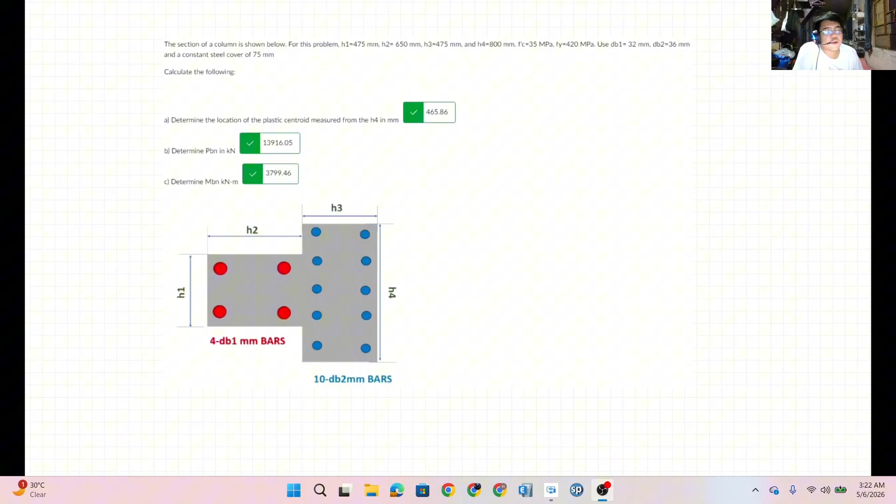Mag-solve tayo ng mga problems ulit about sa diniscuss natin last time, yung columns with eccentricity. For this problem, T-column naman yung isosolve natin. Tignan natin kung paano mo solve to. Again, this problem is from my prof, exercise niya sa akin. So shoutout sa prof ko dyan, sir. Okay, try natin mag-solve ng T-column, tas tignan natin kung anong pinagkaiba yan sa square or sa rectangle.

Sabi dito, the section of a column is shown below. For this problem, we will use H1 is equal to 475 mm. Lagay muna natin yung mga dimensions. This one is 475 millimeters. Tapos yung H2 natin is 650 mm. Kapalan nga natin yung dimension, so this one is 475 mm. Then our H3 is 475. And lastly, our H4 is 800 mm.

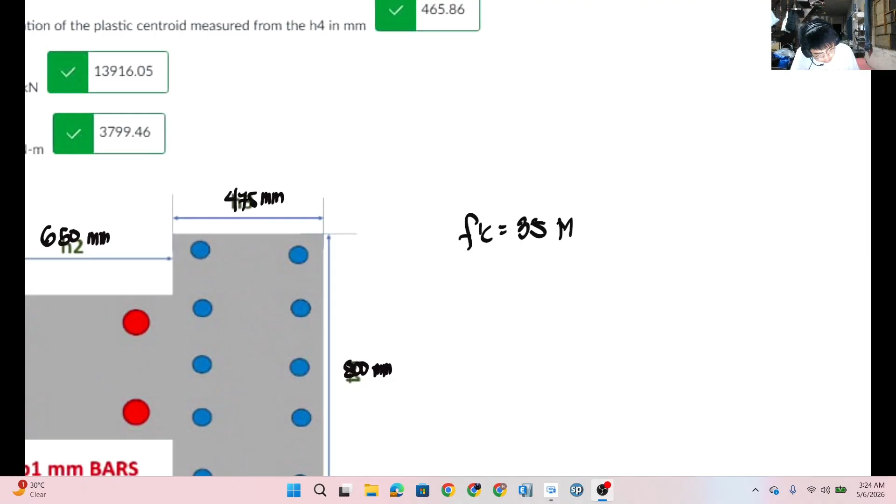Then we are given material properties: F prime C natin is 35 MPa. And our Fy is 420 megapascals. Use dB1 or the diameter of bars na pula, 32 mm. Tapos sa dB2 naman, 36 mm. And the constant steel cover is 75 mm, meaning lahat ng bakal natin is 75 mm yung distance nila or yung distance ng centroid nila from the face ng column. So lahat ng sides na yan, 75 mm yung pagitan from the face of the column.

By the way, may mga tamang sagot tayo, no? Tumama si classmate dito, so may reference tayo. Papakita lang natin kung paano nakuha. Determine the location of the plastic centroid measured from H4. So saan ba H4, guys? Ito yung H4. Okay, this is your H4. So unahin muna natin yung plastic centroid.

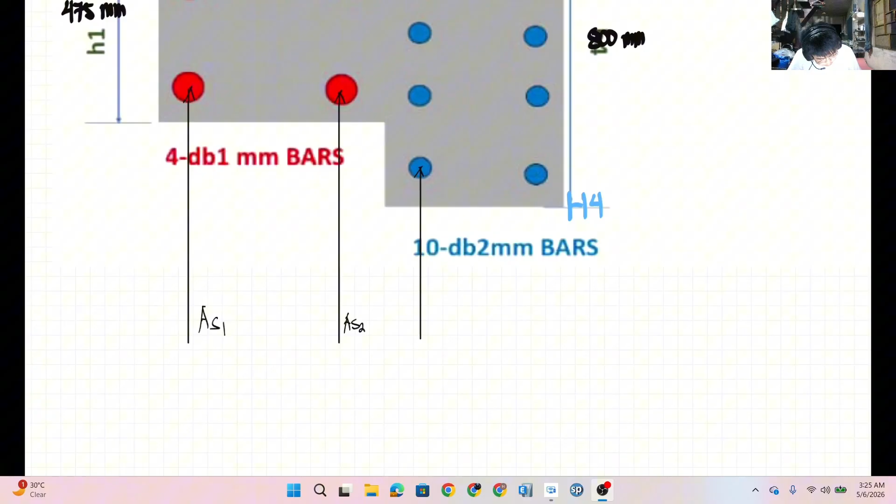Wala namang pinagkaiba yung approach pagdating sa plastic centroid. Kailangan lang natin ulit na magsukat-sukat. Pangalanan muna natin yung ating mga bars. Let us say this is AS1, this is AS2, the third steel is AS3, and the last is AS4. Paano naman yung CC natin or the concrete? Irregular na siya, hindi na nag-aak sa gitna. So pwede natin gawin ay hatiin natin yung concrete section natin o yung section natin mismo para magkakaroon tayo ng dalawang concrete section.

Dalawa na magiging natin gross area. Paano yan, classmate? Pakita natin kung paano. Sabihin natin na dito, nahatiin natin, so therefore magkakaroon tayo ng dalawang concrete. Let us say na ito yung CC1 natin, tapos ito yung CC2. Sa gitna pa rin nag-aak yung ating CC o ang compression concrete. Bakit natin hinati? Kasi mahirap hanapin yung centroid niyan kung T-section. Pwede naman, wala namang problema doon, pero ako, for simplicity at para mas madali yung approach, hatiin na lang natin sa dalawa. Dalawang rectangle, tapos yung kanya-kanyang compression concrete nun, mag-a-act sa centroid nila.

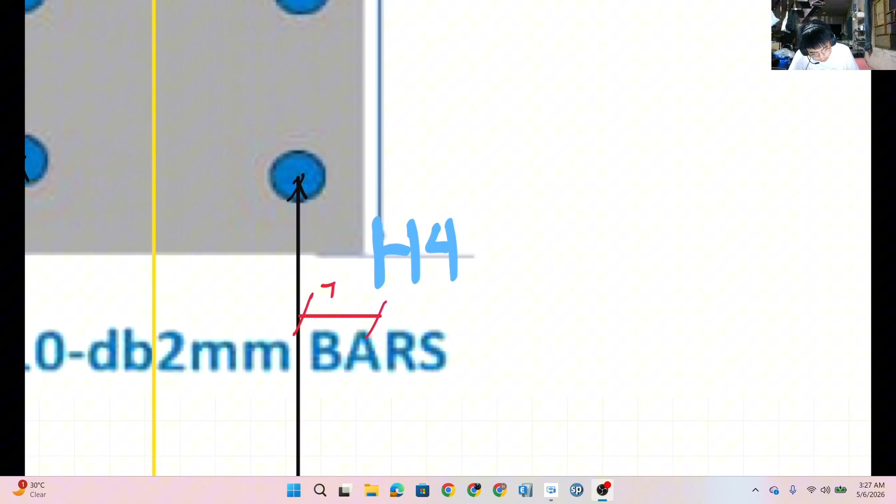So ayan, H4, yung reference natin. So we have to measure distances from the H4. Sabihin natin ito, di ba given tayo ng steel cover na 75 mm, and the distance ng centroid niyan from the face of the column is 75 mm. Tapos ito, yung AS3 natin is 475 minus 70. Bakit? Kasi ang distance nito is 70 mm, no, lahat 75 pala. Kasi lahat ng ating bars is 75 mm yung steel cover nila from the face of the column. Gamitin natin yung concept na yon. So ayan, 75, so magiging 475 minus 75, that is 400. Kita naman, guys? Sige pakita natin, ayan, this is 400.

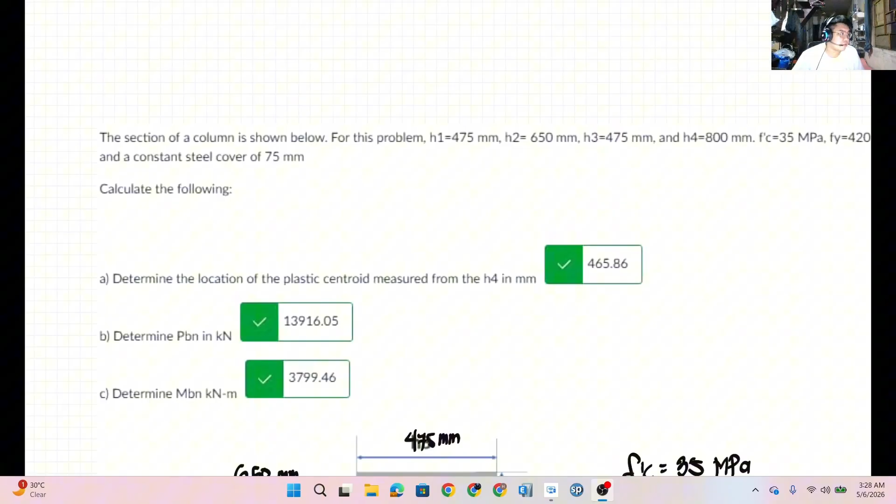Tapos yung ating AS2, and distance niyan from H4 is 475 plus 75. Bakit tayo nag-plus ng 75? Kasi di ba yung steel cover natin is 75, from the face of the column yun. At kung 75 yan, di 75 din to. Eh sabi nga kasi constant yung steel cover natin, so kahit anong direction yan, basta humaharap siya sa face ng column, 75 yon. So ayan, 475 plus 75, gawin na natin yung calculate natin. Lumabas sa ating computation ay 550, ang distance ng ating AS2 from the H4 o yung rightmost na face. So yung AS1 natin, lastly, since yung steel cover nga natin is constant, 75 to.

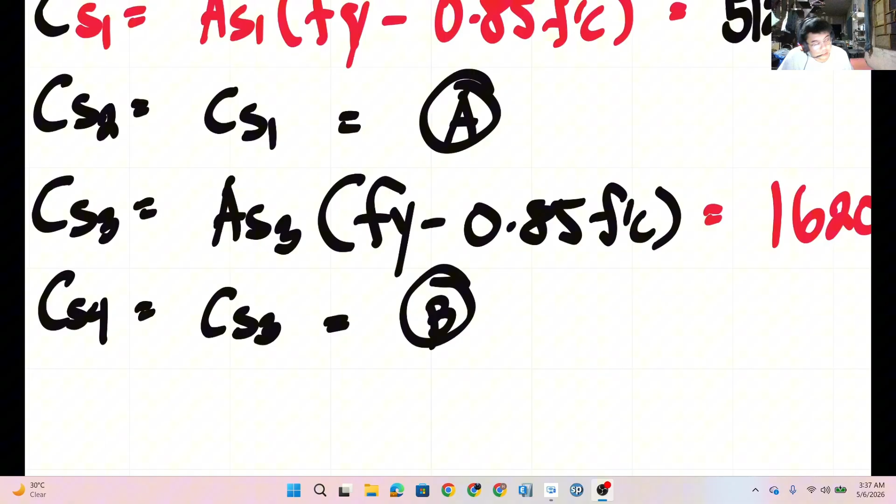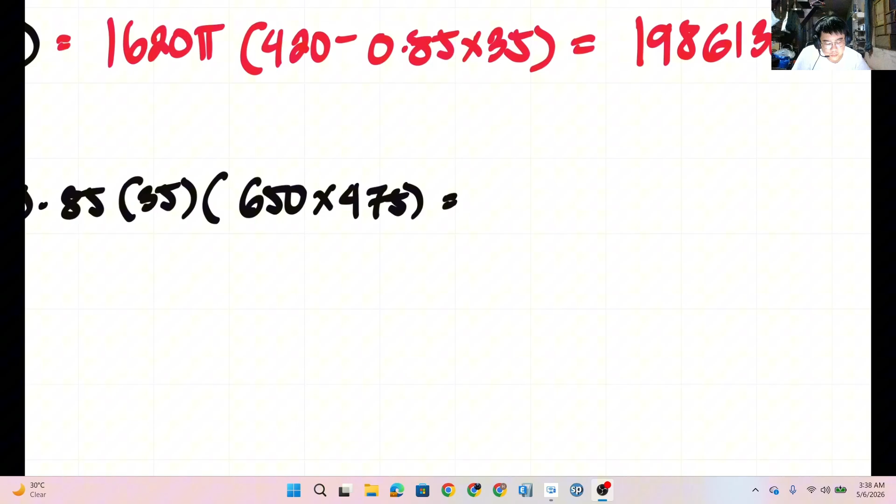We know the formula for CC is 0.85 F prime C AG. We have two gross areas because we cut the T column, so let's call this AG1. Let's substitute the values: 0.85 times our F prime C which is 35, then our AG1 is going to be 650 times 475, which is the gross area. So the value is going to be 0.85 times 35 times 650 times 475.

That's going to be 9,185,312.5 Newton. Let us store this value in letter C for our CC1. For CC2,

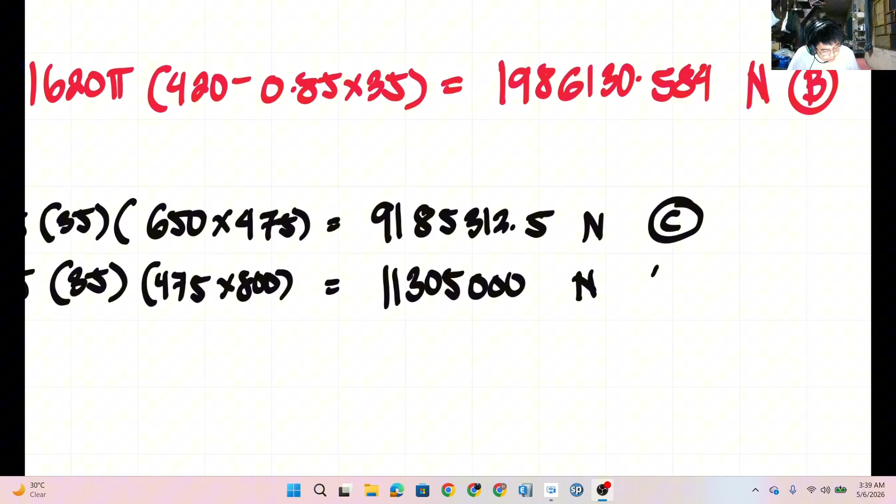0.85 F prime C again, but with AG2. Let's set up 0.85 times 35, and for AG2, area again, and that is a rectangle so length times width: 475 times 800. So the value is going to be 0.85 times 35 times 475 times 800. So the value we got is 11,305,000 Newton. Let us store this value in letter D.

So, our forces are now complete. Next step, step 2, let us solve for the resultant. Again, the resultant is simply the summation of forces, so let's sum up all the values we got. There are 6 of them, so let's just add them all.

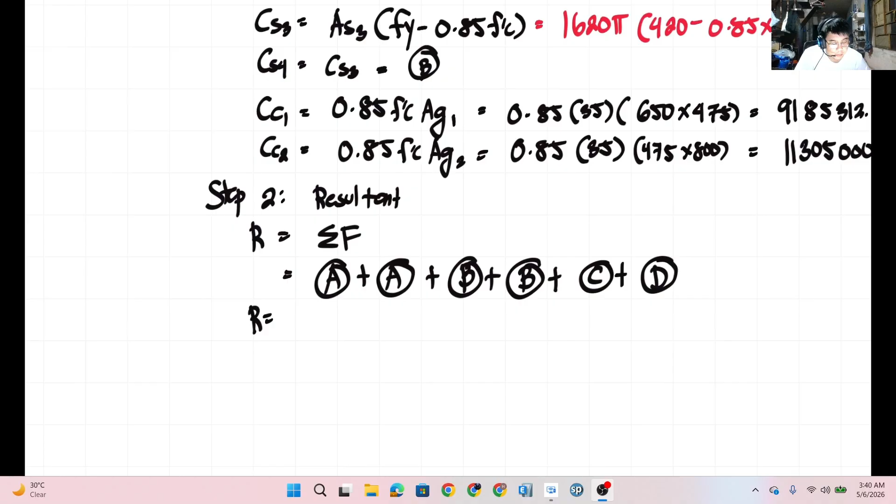That is going to be CS1 stored in letter A, plus CS2 also stored in letter A, plus CS3 stored in letter B, plus CS4 stored in letter B, plus CC1 stored in letter C, and lastly CC2 stored in letter D. And the resultant of our forces is going to be letter A plus letter A plus letter B plus letter B plus letter C plus letter D.

So the resultant we got is 25,718,004.36 Newtons. Let us store this value in letter E.

So for the last step, step 3, this is just Varignon's theorem. So, x bar PC or the plastic centroid is equal to the summation of forces times their distances from the left face, or rather the right face of the column. So there we go, we also have the distances now, so we can get x bar PC, the plastic centroid. Our resultant is stored in letter E, then x bar PC as our unknown is equal to... let's get CS1 first.

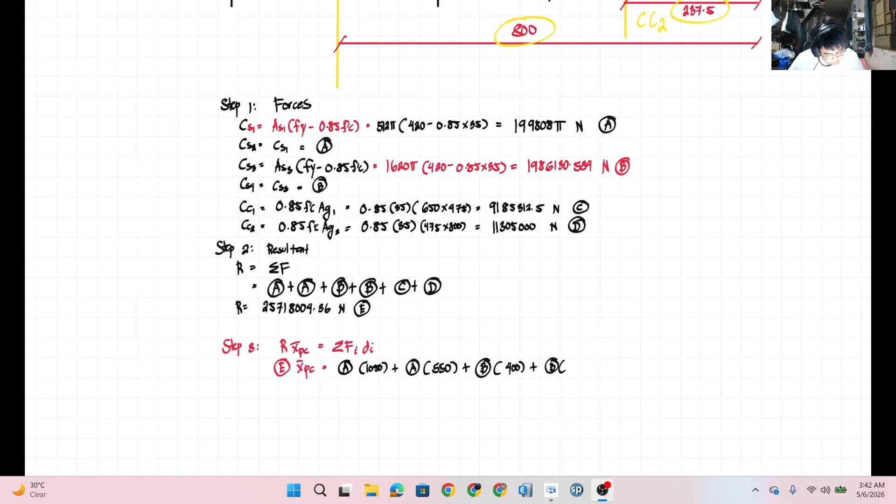So 550 plus our CS3, which has a distance of 400 from the right face, which is our reference. Plus CS4, also stored in letter B, same since they're the same, so it has a distance of 75 from the right face. So 75. Plus our CC1, stored in letter C, which has a distance of 800 mm from the right face. So let's just place it. Plus letter D, which is our CC2, with a distance of 237.5.

Now we can solve for the plastic centroid. This is a shift-solve problem, though you could also just divide everything by letter E. I'll just do a shift-solve. So letter E times x equals letter A times 1050 plus letter A times 550 plus letter B times 400 plus letter B times 75 plus letter C times 800 plus letter D times 237.5.

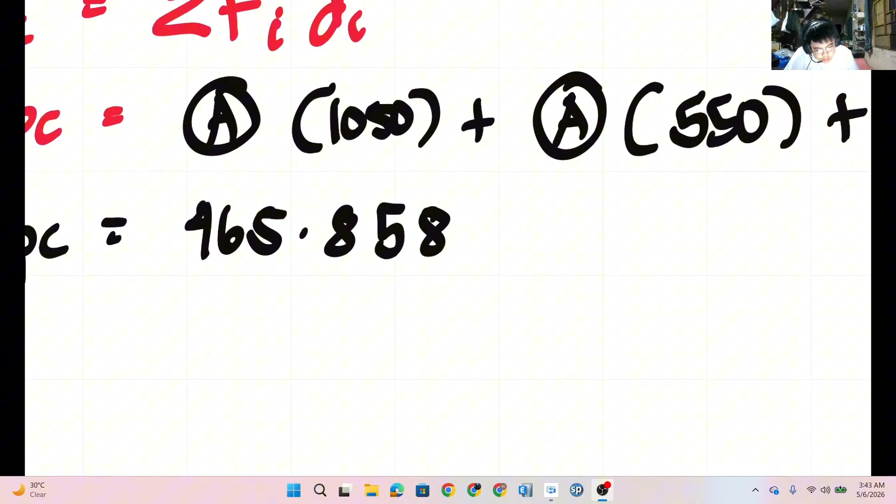So upon shift-solving, the value we got is 465.86 — two decimal places, okay. Let's complete it, we might need it later: 2335. Rounding that off to the nearest two decimal places, that is going to be 465.86 mm. Let's box that.

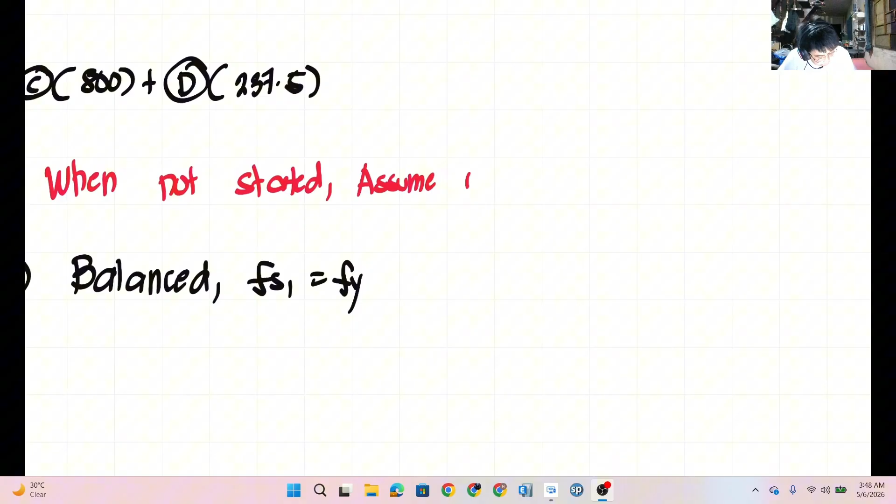When not stated, assume positive bending about the y-axis. So when the direction of bending isn't stated in the problem, we will consider positive bending about the y-axis.

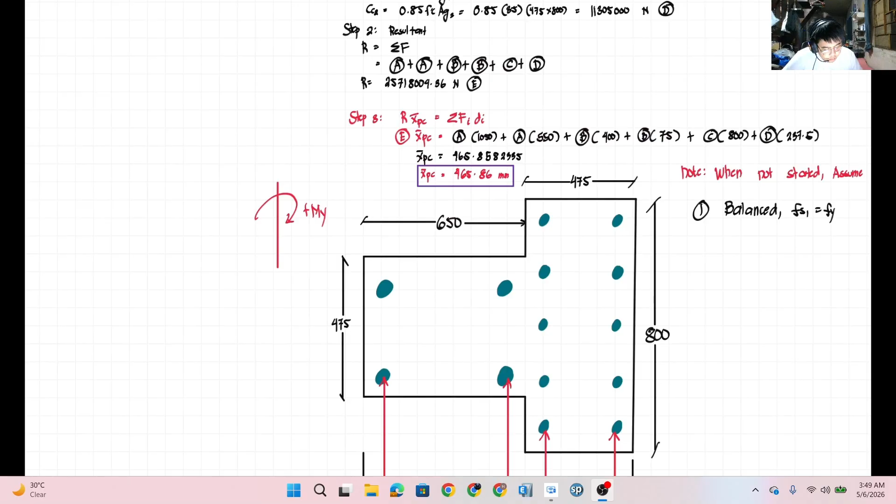In this case, it's positive bending moment about y. Therefore, the rightmost face is what experiences compression, and that would be our ECCF. Don't get confused by this, we already explained this concept in the last video.

Again, when it's positive bending moment, our ECCF is going to be the rightmost. So classmates, what about when it's negative bending moment?

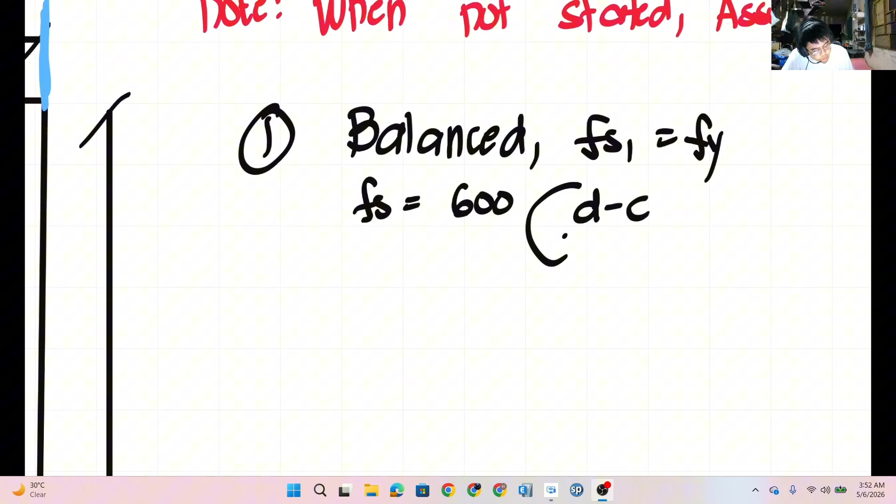So we can now equate this. Our FS1, or AS1, the extreme tension bars, farthest from the ECCF, is at yielding condition. So we'll use the formula Fs equals 600 times D minus C over C, and since this is Fs1, we use D1.

Let's substitute now. Our Fy is 420, let's use that. So it's equal to 600 times D minus C over C. Again, this is balance condition, so C balance.

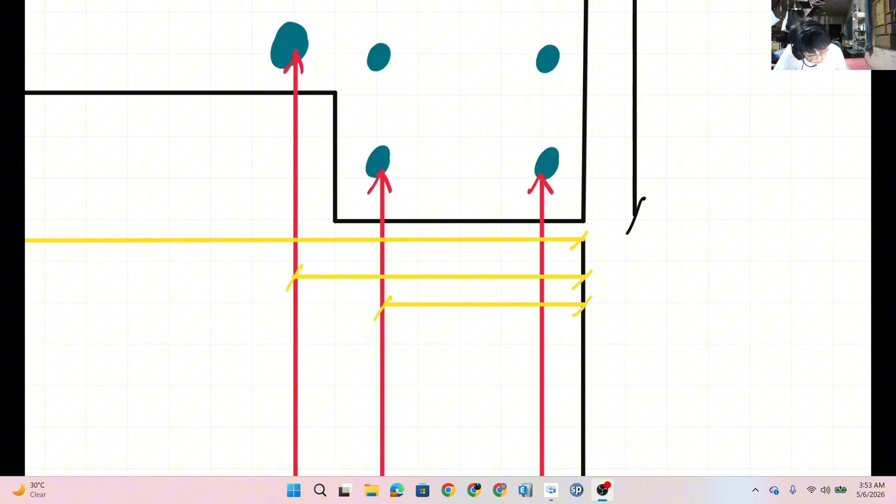So our D1 is going to be 1050 - that's in millimeters, don't get confused. Our D2 is going to be 550. Our D3 is located 400 mm from the ECCF. And D4 lastly is 75.

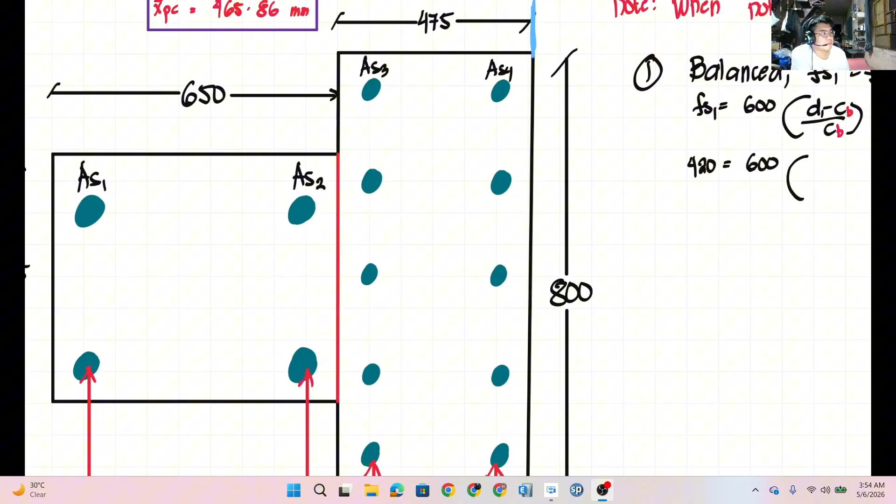Our D1 is 1050, so let's use that: 1050 minus C balance, over C balance. Now let's solve for the value of our C balance.

420 is equal to 600, 1050 minus alpha x over alpha x, which is our C balance. So, ano ang ating value dito ay

Di ba meron tayong relationship between A and C? A is equal to beta 1 C. And let us solve for the beta 1 muna. Since ang f prime c natin is 35, that is greater than 28, so lalagyan natin ng formula.

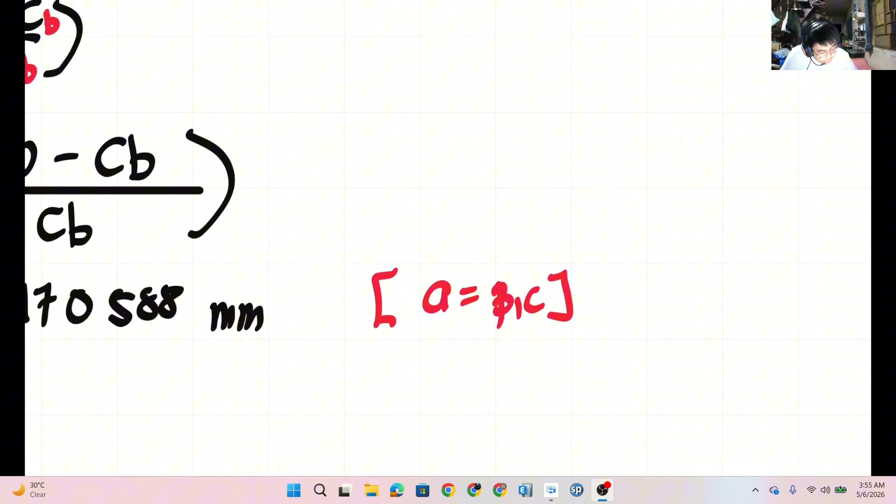Kung naalala pa yung formula, that is 0.85 minus 0.05 over 7, tapos F prime C minus 28. Dapat alam natin yung by heart. Palitan natin to ng 35, so makukuha natin yung value ng beta 1 natin. Store muna natin to, baka magkalimutan, store natin to sa letter A.

Ang nakuha natin value ng beta 1 ay 0.85 minus 0.05 over 7 times 35 minus 28. Ang nakuha natin ay 0.80.

So, we can now solve for the value of A. Ang A balance natin pala is 0.8 ng C balance, which is nakastore sa letter A. So A balance natin ay may value na 0.8 times alpha A, that is going to be 494.1176471 mm. Sorry guys, kilonewton mm. And let us store that value sa letter B.

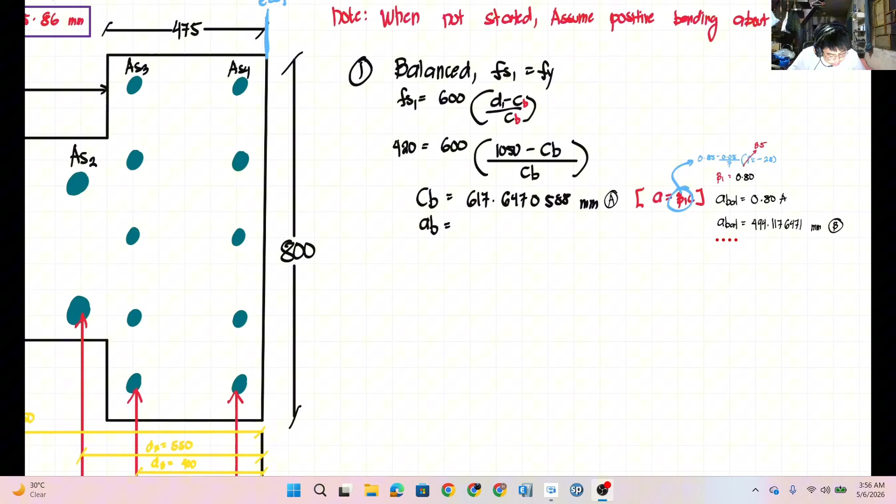Lipat na lang din natin to. So pwede na nating i-plot actually yung C balance sa A balance natin para makagawa tayo ng strain diagram. Alam natin na yung C balance natin located 617 millimeters from the ECCF.

Mag-approximate lang tayo kung saan yan guys. Since ito, 550 to, yung dito natin, lalagpas siya. Let us say na located yan around here. Ibahin natin yung kulay. Ayan, this is our C balance.

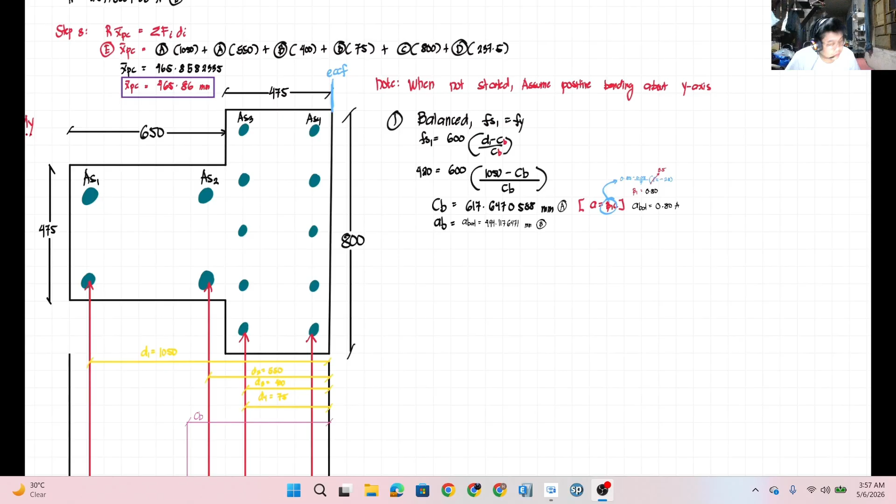Yung A balance natin is located 494 mm approximately. Saan yan? Since ito, 475, lalagpas siya ng rectangle na section na to. Ito, so somewhere here siya. Pero i-plot natin. Pero hindi siya lalagpas ng D2.

Mag-approximate lang tayo ng distance. Siguro somewhere siya here. Ibahin natin yung kulay para mas malinaw. Red na lang, ay wag red, siguro black na lang.

This is going to be the value of your AB. Plot lang natin dyan sa baba, at gawa tayo dito ng line siguro dito. Masyado makapal, nipisan lang natin. Ano ibig sabihin yan guys, by concept alam natin, na-explain natin to nung isang araw.

Yung C value natin indicates if steel bars is in compression. Alam natin yon. Yung C value natin, kapag yung mga steel bars mo nasa loob ng C value, ibig sabihin in compression siya. Otherwise, kapag nasa labas na siya ng C value, in tension na siya. So how about yung A?

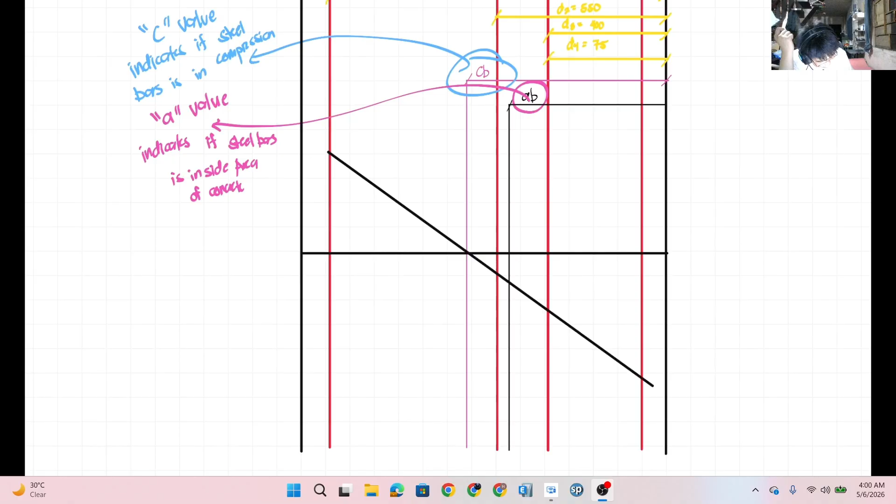Mag-plot lang tayo dito ng line para makagawa tayo ng strain diagram. Paano ba yung strain diagram na yan? Ibahin nga natin yung kulay para maganda, sabihin natin green. Alam natin yung AS1 natin, these bars,

is equal to Fy kasi in-equate natin yan, di ba? At balance condition, yung Fs1 natin is equal to Fy. Tapos ito naman yung ating Fs2, tapos ito yung ating Fs3, tapos ito yung Fs4.

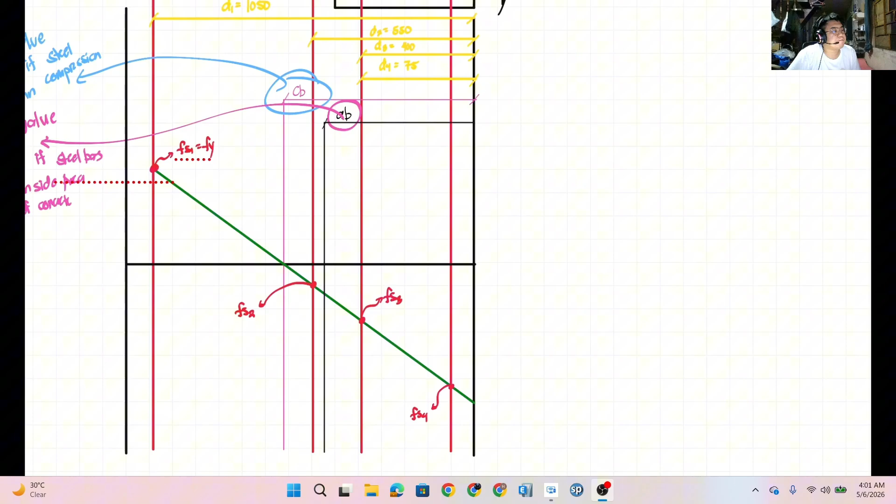Pero hindi natin kailangan mag-assume guys, kasi naka-balance condition naman tayo. Meron tayong value ng C, ayan makukuha natin yung mga actual steel stress nila. Tignan na lang natin, palitan na lang natin mamaya yan kung mag-yield ba o hindi. Pero hindi natin kailangan mag-assume kapag balance condition. Nag-assume lang tayo kapag may given tayo na eccentricity. In this problem naman, pinapasolve lang yung value at balance condition.

Step 2 tayo. Yung step 2 natin are the stresses.

Okay, so we know our Fs1, guys. We don't need to solve for Fs1 anymore because we equated that to Fy. At balance condition, we equated that to Fy. So the value is 420. So, Fs2.

And if you noticed, our Fs2 is inside the C value or the compression balance. So that means it is in compression. So the formula we'll use there is 600 CB minus D2 over CB. Okay, let's solve it.

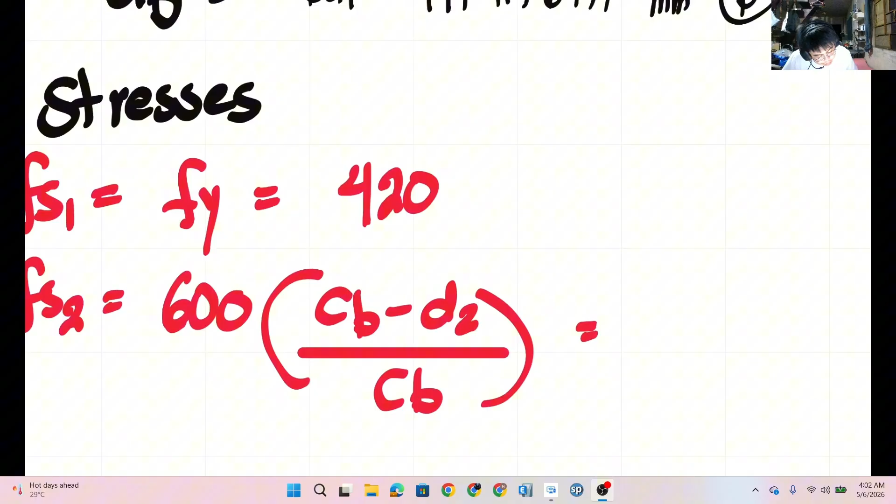By the way, the value of our CB is stored in letter A. And our D2 here is 550. Okay, so we can now solve for the value. 600 alpha A, alpha A minus 550 over alpha A. Okay, so the value we got here is 65.7142857.

And this is less than Fy, therefore it's non-yielding, non-yielding condition. So let us store this value in letter C. Okay, our Fs3. And again, it's inside the compression zone.

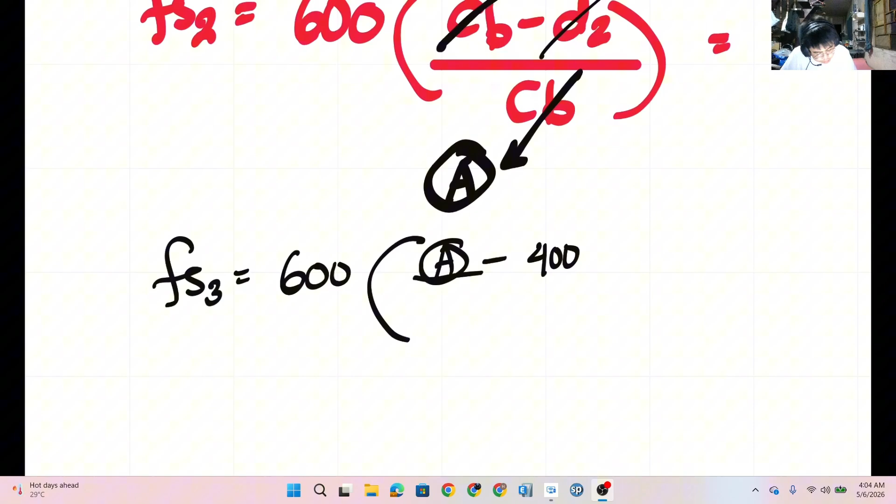So the formula will be C minus D over C. I'll go straight to it, guys. Alpha A, our D3 is 400, over alpha A. So the value we got there is 211.4285714, and again this is less than Fy.

Therefore non-yielding again. So we have to store that value in letter D.

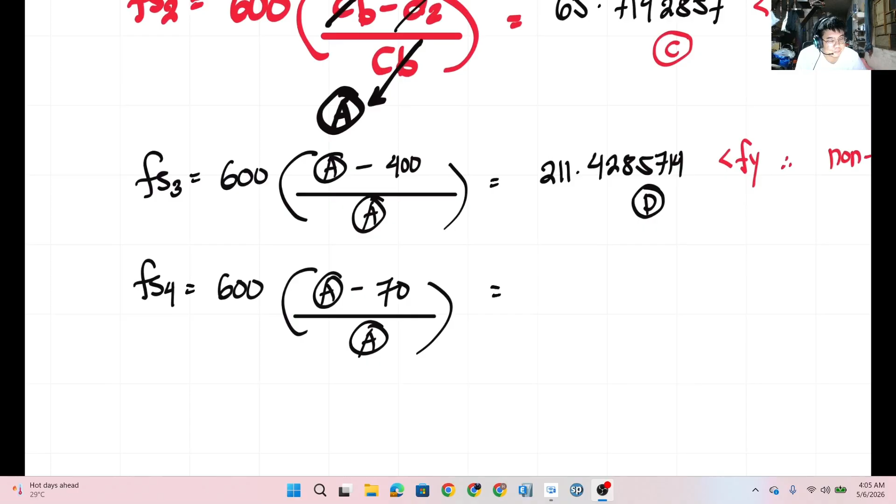So Fs4 is 600 alpha A minus 70 over alpha A or the C. And again, it's inside the compression zone, so we use the formula C minus D over C. So that's going to be 600 alpha A minus 70 over alpha A. So what we get here is 532, and this is greater than Fy. Therefore it yields, so we will use 420.

Okay, so next, guys, we're done with the stresses. We can now solve for the forces. Okay, forces na tayo. So how do we get our forces?

So we know our AS1, guys. AS1 is outside, it's not inside C, so therefore that is in tension, so we can name that T1. Then our AS2, it's inside C, so that is in compression, we can name that CS2. Same with CS3 and CS4. Okay, we'll get to CC later.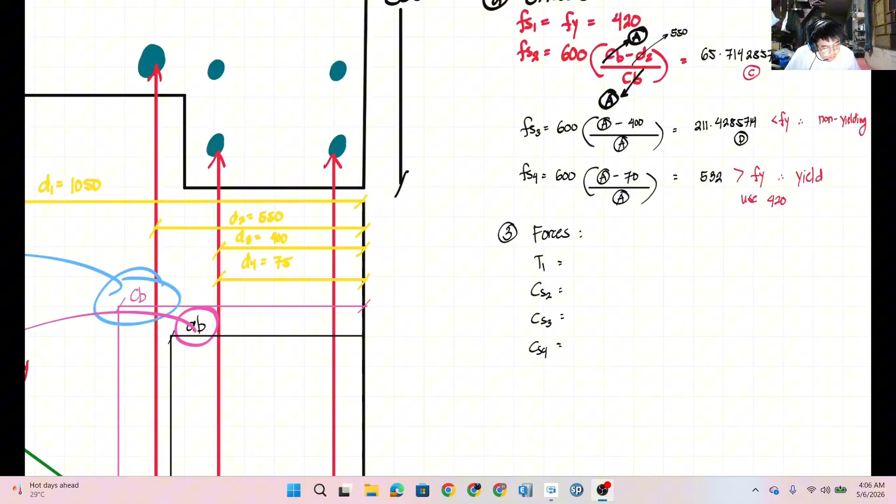Okay, so our T1, and since that is in yielding condition, and it's far from the value of our A, it's outside the value of our A, so we won't be applying displaced concrete. So it's just AS1 times Fy.

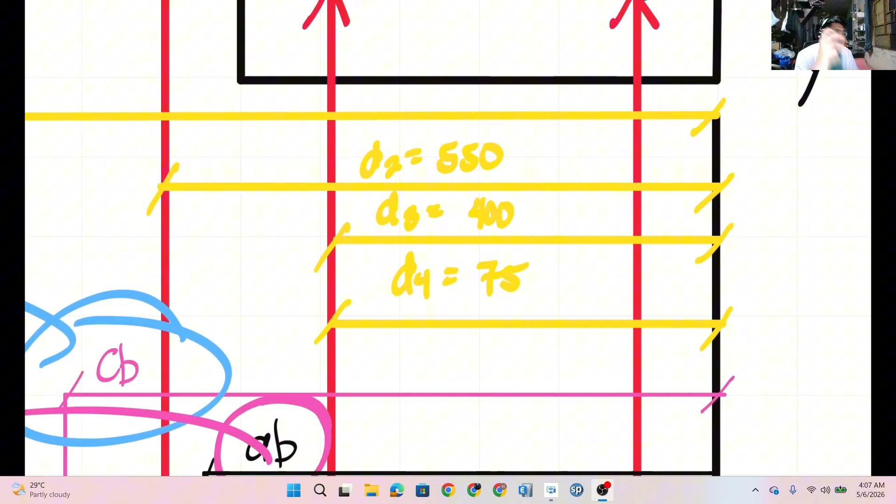For CS2, it's the same, since it's not yet inside our value of A, or the depth of the compression block, so we won't be applying displaced concrete yet for CS2. Is that clear, guys? Because the depth of our compression block is 494, but our D here is 550, so it's not inside the depth of the compression block, so we don't subtract displaced concrete yet.

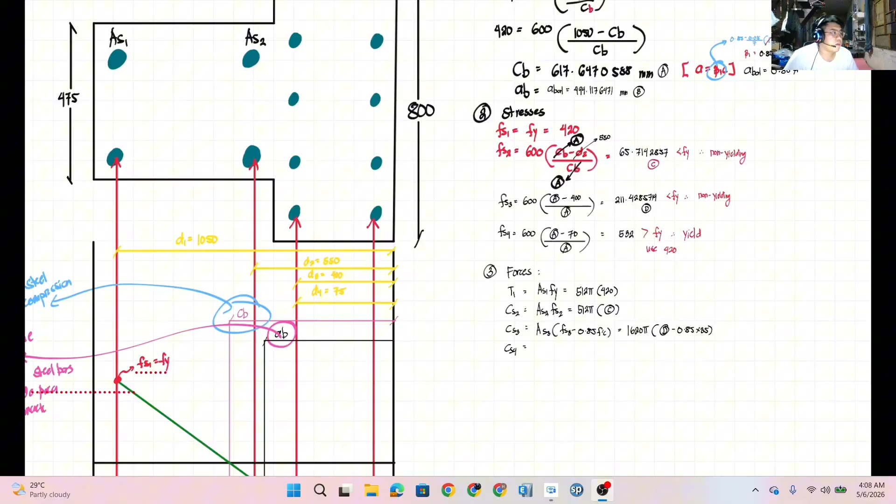Then our CS4, again, it's inside the depth of the compression block, so we subtract the displaced concrete. So AS4, and that is in yielding condition, guys, so we will use 420. Fy, minus 0.85 F prime C. So 1620 pi times 420 minus 0.85 times 35.

Okay, so we can now solve for the value of our forces. So our AS1 is 512 pi times, T1 pala, sorry. The value we get here is 215,040 pi, and that is in Newtons. You get why it became Newtons?

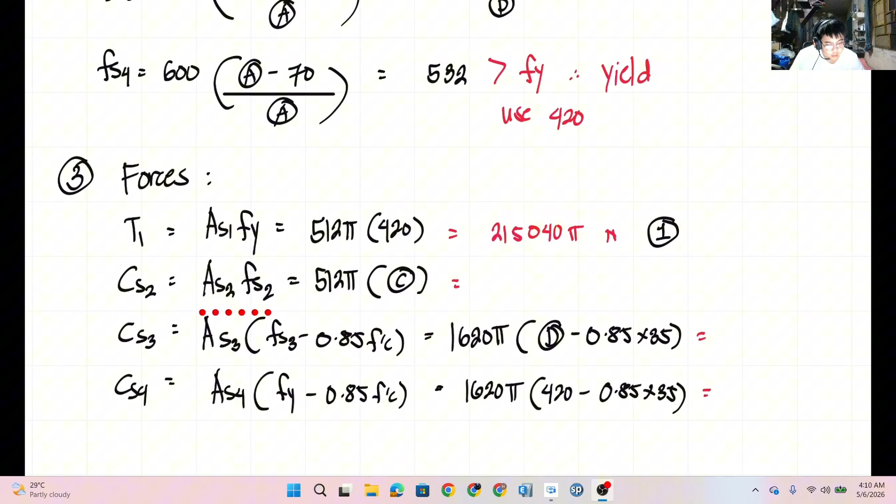We already explained why. And we can store this value, if you're following along, let's just call it number 1. Okay, so 512 pi times alpha C again for CS2. So the value we get here is 105,701.1288 Newtons. Let us store that value as number 2.

Okay, so for our CS3, 1620 pi, alpha D minus 0.85 times 35. So the value we get here is 924,631.3058 Newtons, and let us store that value as number 3.

Okay, so lastly, 1620 pi times 420 minus 0.85 times 35. So the value we get here is 198,6130.584 newton. And let us store that value as number 4.

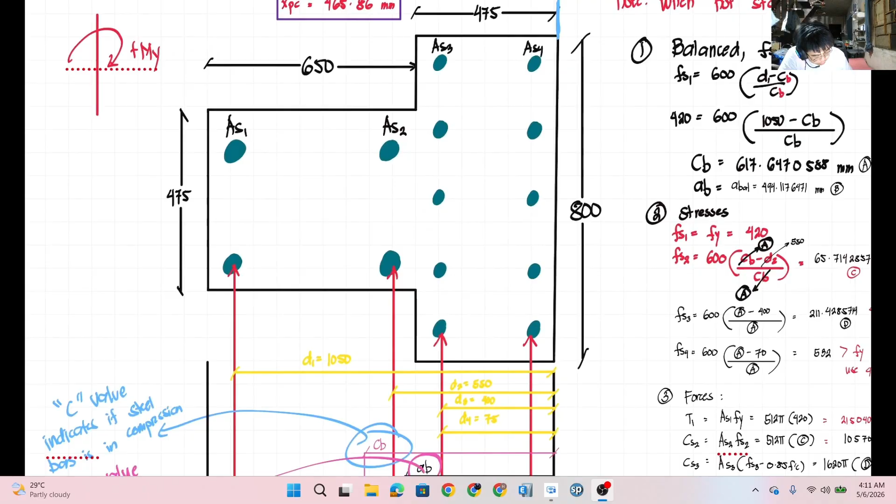So let's move this a bit. Now, we can say that this is the area of our concrete. Let's shade this. This is the area of our concrete. Sorry, it's not neat, but I hope you get the point. That's our concrete area.

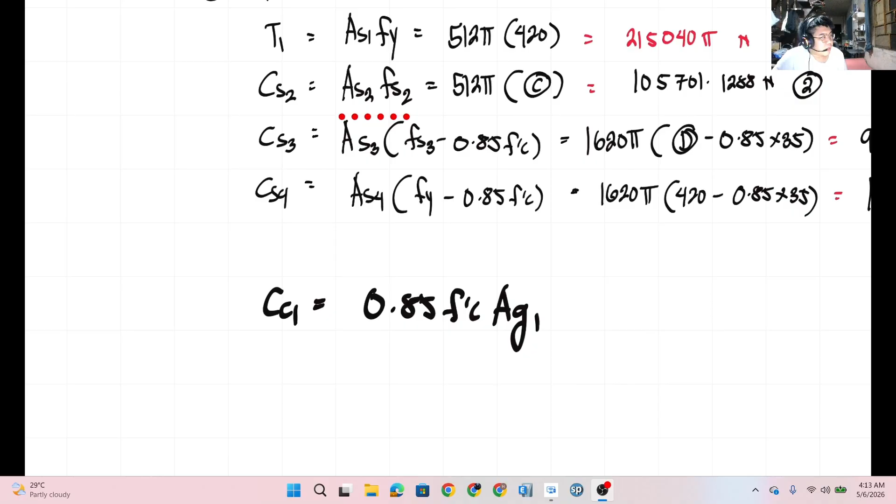Our CC1 is going to be 0.85 F prime C, times Aconc1, the gross area, area of the concrete, area of concrete 1. So it's 0.85 times F prime C, 35, times the area of concrete for CC1. If you notice, we can get that, this is what will be its depth.

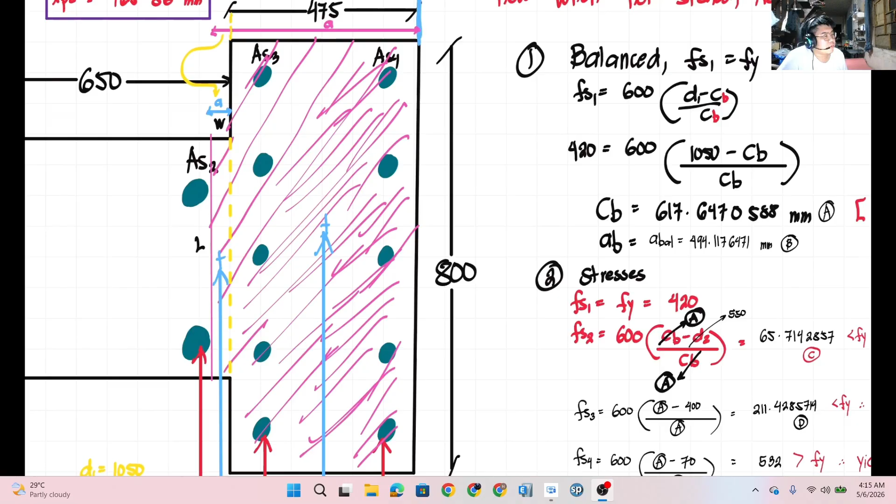Okay, for our CC2, it's the same, 0.85 times F prime C, times area of concrete 2. So 0.85 times 35. Then how about area of concrete 2? Didn't it consume the entire section there? So that will be the area of concrete 2, 475 times 800.

Okay, so we can solve. For our CC1, that's going to be 0.85 times 35 times 475 times, alpha B minus 475. The value we get here is 270,156.25 newtons, and we can store that value as number B.

Number B? Number 5. Number 5, guys. Okay.

Okay, so for our CC2, 0.85 times 35 times 475 times 800. The value we get here is 11,305,000 Newton, and we can store that value as number 6.

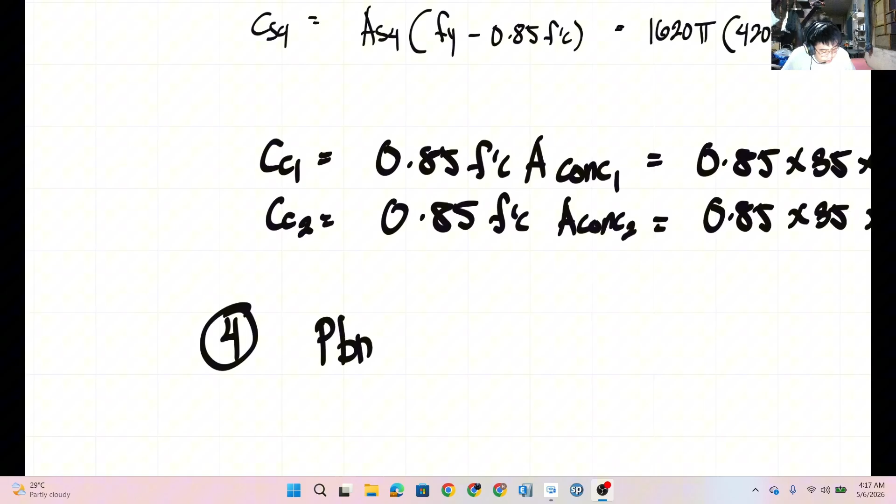So how do we get our PBN now? Our PBN, or the nominal axial capacity, is just a summation of the forces. Summation of forces, and of course we have to respect the sign convention. So how does that sign convention go? We know that when it's tension, that is away from the section. So T1 is downward. When it's compression, it's towards the section. So both here are in compression. So let's set that up.

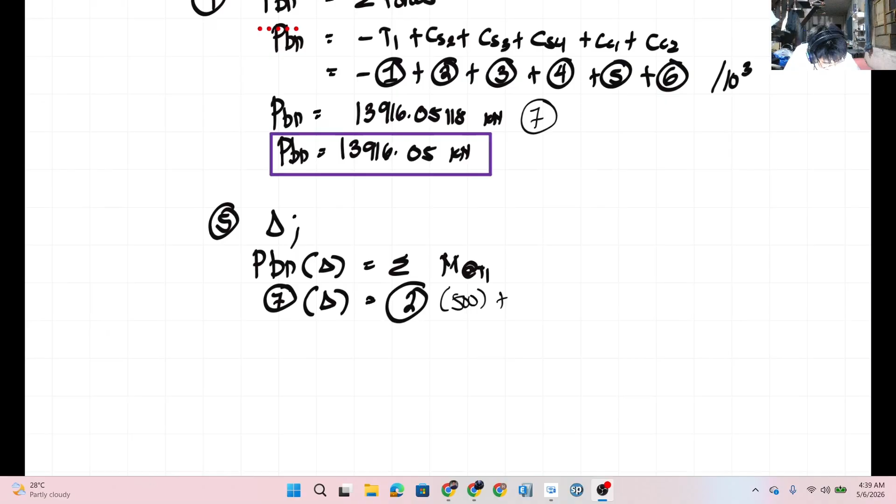So yung CS2, meron daw yung moment arm na 500. Okay, plus CS3, may moment arm na 650. Plus CS4, na may moment arm na 975.

Okay, plus CC1 natin, na may moment arm na... CC1 pala. Okay, hindi pa pala nakuha yung CC2 na moment arm. Okay, pero madali lang yan. D1 minus ano lang yan, 475 over 2.

Okay, bakit? Kasi dito yung centroid ng ating CC1. Dyan yung resultant niya nag-a-act sa centroid nung first section, yung section sa right na kinuha natin. So magiging D1 minus 475 over 2.

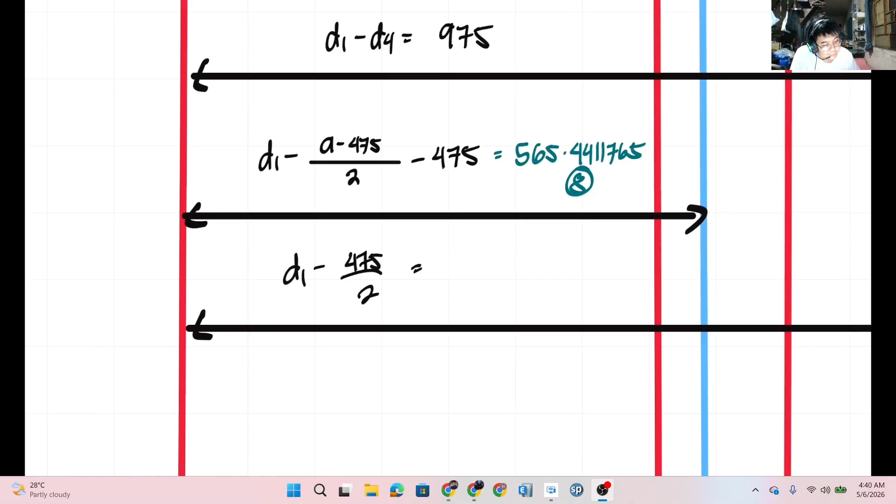Okay, so pwede natin kunin din yung value niyan. 1050 minus 475 over 2. So value niya is 812.5. Okay.

So CC2, for CC2 meron niyang moment arm na 812.5. So we can now solve for the value of our delta. Ayan, shift solve lang tayo.

So, recall 2 times 500 plus recall 3 times 650 plus recall 4 times 975 plus recall 5, recall 8, plus recall 6 tapos 812.5. Shift solve lang natin guys.

Make sure na tama yung mga naka-store na value sa inyo. Ayan, so nakuha natin yung value for delta is, oh wait lang, ang laki. Bakit ganun? Check lang natin.

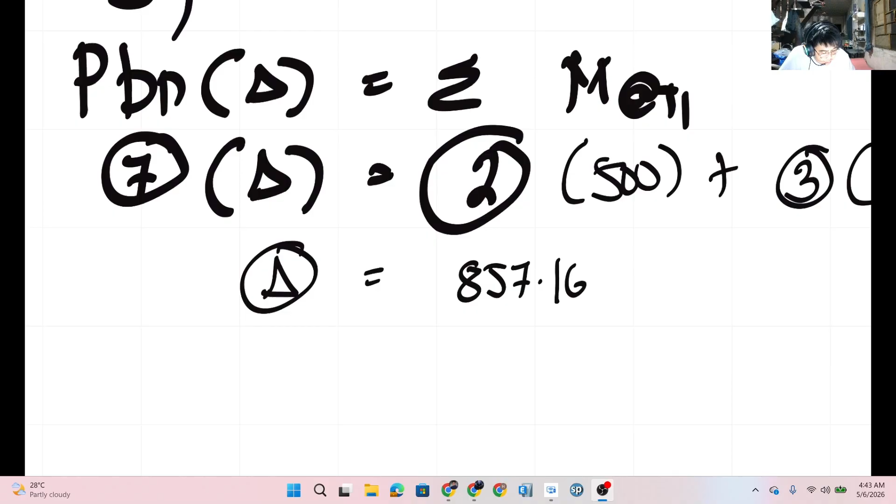Ayan, so nakuha natin yung value for our delta, guys, is 857.1690378 mm. Okay, step 6 tayo. Alam natin by concept, naalala yun yung

sa pagkuha ng ating eccentricity or sa pagkuha rin ng ating delta. Alam natin na yung XPC natin or the plastic centroid plus the balance eccentricity is equal sa steel cover plus delta. So ayan, kita naman dito. Pag pinag-add mo to, tapos pinag-add mo to, equal yan dito, tapos dito. Okay, so makuha natin yung balance eccentricity.

Okay, lagay lang natin: SC plus delta is equal to plastic centroid plus E-balance. Okay, and meron tayo ng value ng lahat ng yan. Pwede tayo mag-shift solve, guys. Substitute lang tayo ng values.

Okay, so ang steel cover natin is 75, plus delta natin na nakastore sa number 9, is equal to x bar natin, gagamitin natin guys yung plastic centroid natin from left, hindi na yung kanina na plastic centroid natin from right. Okay, yung from left na. So yan,

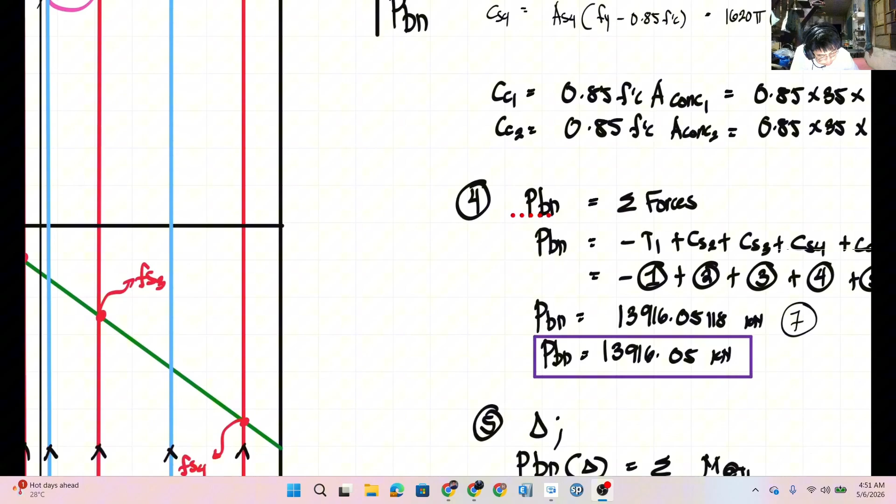659.1417665 plus our unknown na balance eccentricity. And pwede natin shift solve. Makuha natin yan: 75 plus 9, plus recall 9, 659.1417665 plus alpha x. So ang value dito ay 273.0272713 mm. Okay, nakuha natin.

And let us store that value sa letter M siguro, hindi pa natin yan nagagamit. Okay, so ayan. So last step or step 7, guys, makukuha na natin yung balance capacity, balance nominal moment capacity natin. Okay, naalala pa yung concept na ang moment is equal to P times E, or load times eccentricity.

Bali gagamitin din natin yon yung concept na yan. So meaning, ang nominal balance capacity mo or moment capacity is equal to PBN times E-balance. And meron tayong dalawa ng value na yan, meron tayong yan pareho. So solve natin. Yung PBN natin naka-store sa 7, times yung ating balance moment capacity is naka-store sa balance eccentricity pala, naka-store sa letter M. And by the way guys, this is in mm, so we have to convert this one pa sa

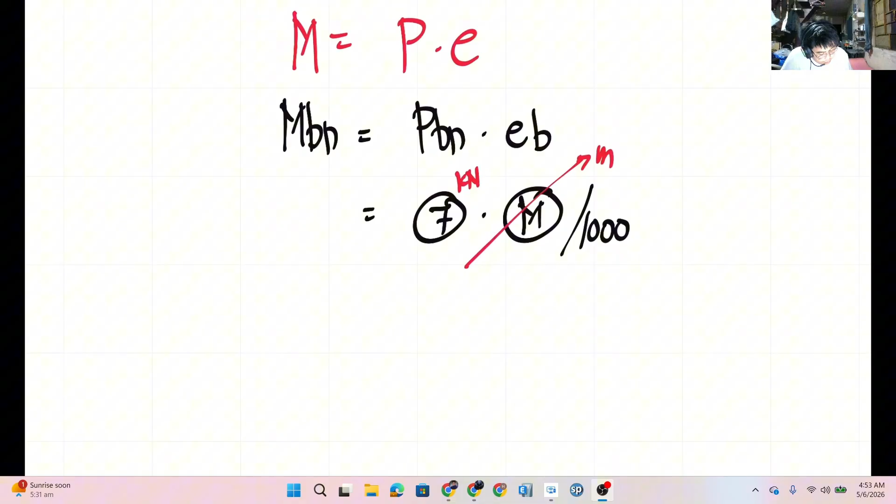meters. So therefore we have to apply conversion factor na 1000 para maging meters. Kasi guys, this is in kilonewton. Kailangan to in meters, kasi para maging kilonewton meter. Okay, ayan, compute na natin.

Ang lalabas na sagot ay, plug in lang tayong values, 13916 or number 7, times alpha m over 1000. Ang value ay 3799.46 kilonewton meter. Okay, box na natin yan.

Check natin kung tama tayo. Okay, ayan, 3799.46, no? So tama tayo. Oops, laki natin yung check kasi pinaghirapan natin yan. Okay, so ayan.

3799.46. So, yung problem na to, hinahanap na yung moment niya. So nakuha naman natin, which is good. Nagkaroon na tayo ng problem na hinahanap yung moment capacity niya, hindi lang puro axial. Okay, so ayan. Sige, wala nang wala nang pag-atubili pa. Next problem agad. Bigay mo.